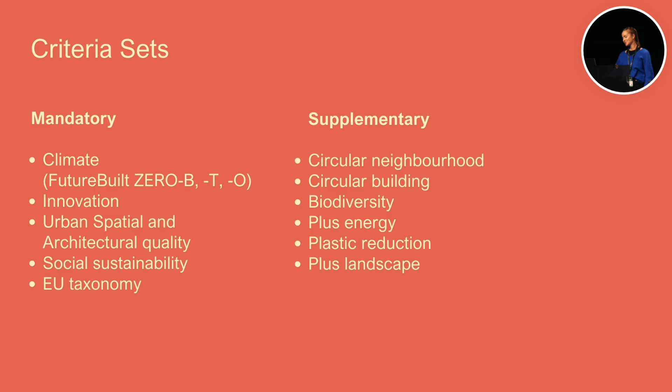And it addresses three main areas. It's B for buildings, T for transportation and green mobility, and O for område in Norwegian, or districts and neighborhoods in English. So the main goal in FutureBuilt ZERO looks quite easy to understand: cut emissions by 50%. And I'll come back to this 50% goal, because even though it looks quite clear, this is quite complex. It's a sliding scale, it differs by building typology, and a lot of research is behind this.

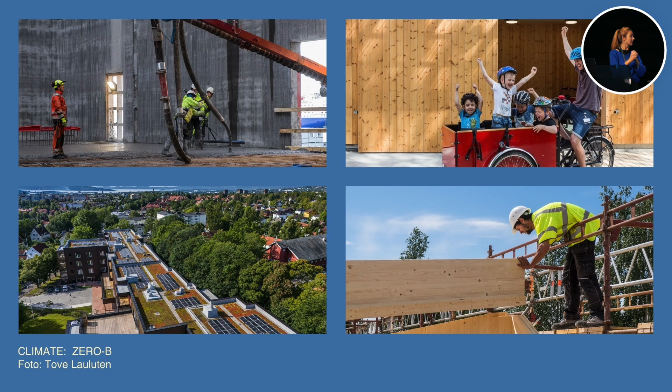But all of the projects need to cut emissions from our four key areas: the construction phase, operational energy use, building materials, and transportation during operation, during a calculation period of 50 years. So to succeed, good decisions must be made early. And our projects need really good data, as we have heard a lot about today, not just to calculate the final building, but they need an information tool so we actually can make good decisions, and also a user interface so the decision makers actually can choose the climate-friendly options. So the data is the key, and this is also where One Click comes in.

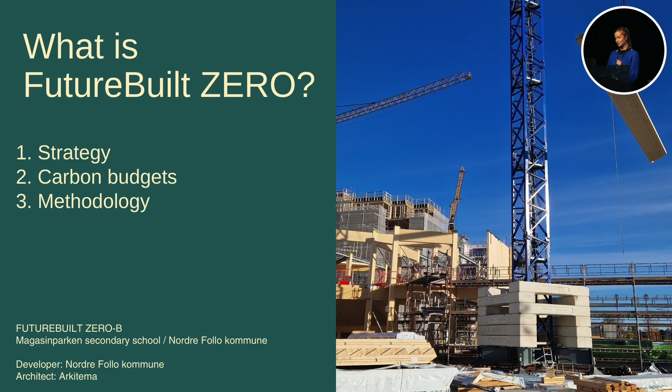So a bit about what FutureBuilt ZERO is, because it's many things. It's a strategy, it's a carbon budget, and it's a method. So first, as a strategy, FutureBuilt ZERO supports the building industry as a key actor in meeting the Paris Agreement. Our sector must take responsibility for its own emissions. And here you can see the reduction roadmap, or the path to net zero.

The Paris Agreement says, as probably all of you know, that we have to cut emissions by 50% in 2030 and 90 to 95% in 2050 from current practice. And you see the current practice here is at 100% in year 2020. This current practice is then projected with the targets in the Paris Agreement, shown in the orange line up there, also sometimes called by us the Paris curve. It's easier to just say the Paris curve.

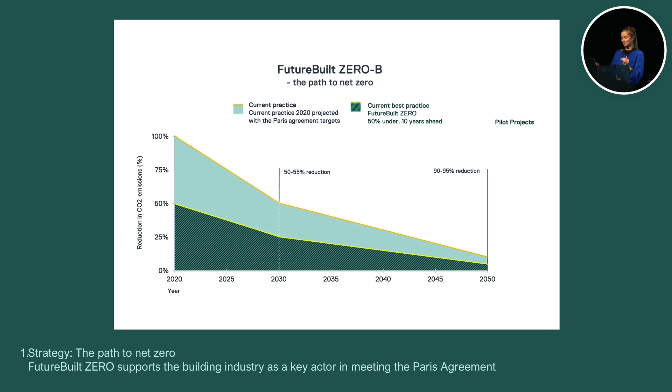So FutureBuilt pilots, they must go even further, 50% below the Paris curve, shown with the yellow line. So this is actually the FutureBuilt ZERO benchmark, the maximum value of CO2 per square meter, depending on the completion year and the building type. And we have 13 different benchmarks for the 13 different building types or categories. So as a carbon budget, so that was the strategy, the budget.

Each dot here is representing a building project, and each pilot must deliver carbon footprint calculations in 3 phases: as designed, as built, and after 2 years of operation. And as you see, this is a mix of all of these 3 calculation types. But as you see, everyone has had the same goal. They want to go below the yellow line. Some succeed, some are still working on reduction. But we can definitely say that we are learning valuable things.

It is harder. Can I take the pointer?

Okay. So it is obviously harder for a listed building with cultural heritage connected to waste-based district heating, as you can see, the first red dot there. It's much harder to reach the benchmark than if you look at the light blue-green dot down here, which is a mass timber construction with its own ground source heating system.

But the shared trend is clear. The more actively a project uses carbon calculations as a management tool, from early phase throughout the operation, the better the results.

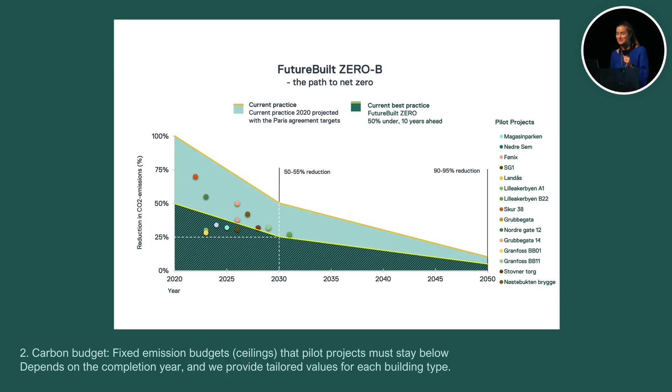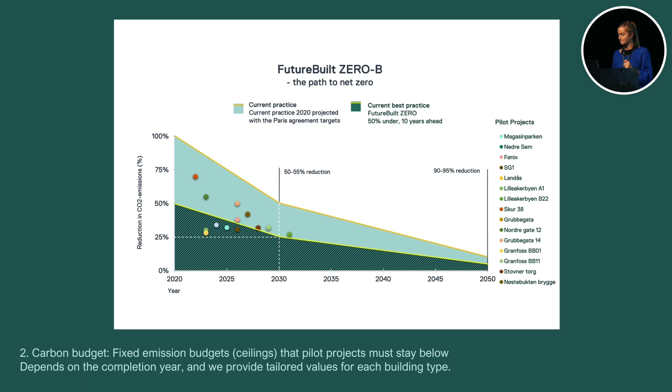And this is a bit more about the 50% goal. As you can see, the Paris curve and the FutureBuilt curve are not linear. So the 50% target is an ever-tightening target. The 50% reduction only refers to current practice in 2020, and then it's a sliding scale. So this means in 2030, we are aiming for 75% reduction compared to levels in 2020, but always 50% below the Paris curve.

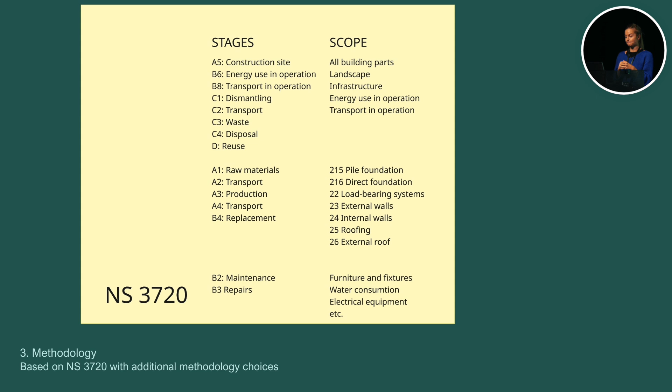So that was the strategy, the carbon budget, and now the method. Since we are trying to help the projects build the lowest carbon building projects in Norway, it's crucial that our method is consistent and comparable. So FutureBuilt ZERO is based on the Norwegian standard NS3720, and in this figure, you can see all the stages and the scopes included in an NS3720 calculation.

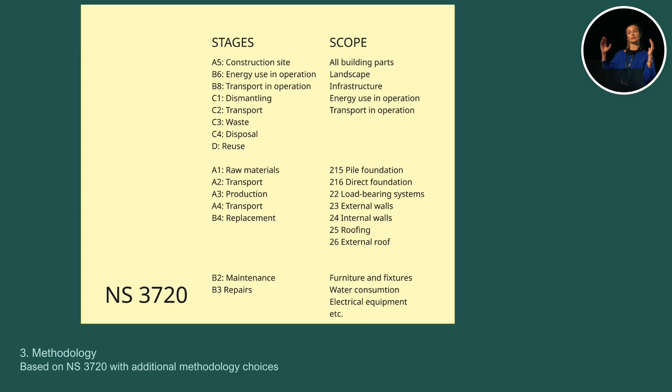So FutureBuilt ZERO is aiming for a wide span. It's based on the Norwegian standard, but in the standard, you can make different choices. For example, you can choose to use the Norwegian electricity mix or European, and all of these choices that are not defined make very unpredictable results for us. So therefore, we have predetermined some of the openness in the standard. And on the right, you see some additional methodological choices in ZERO.

So ZERO includes a dynamic LCA, meaning it accounts for when emissions occur. So we have time weighting, technology development, carbonation of cement, biogenic carbon uptake, potential for future reusability, and also a 50-50 allocation of district heating when it's based on waste handling. So we need our own method to control all of these parameters so we can learn from the pilots, compare them and identify the right path towards net zero.

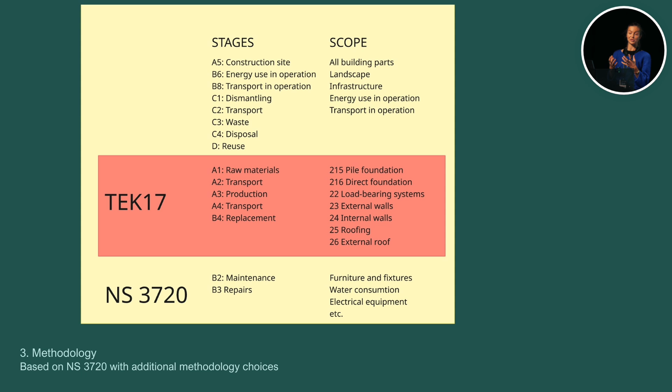These methodological choices are not necessarily more expensive or more complicated; time weighting is simply an adjustment. So the main challenge here is the expanded scope. But of course, we really want to know the whole history of the building. So we want to include ground and foundations and HVAC systems in our calculations, because that gives a real impression of the building's footprint.

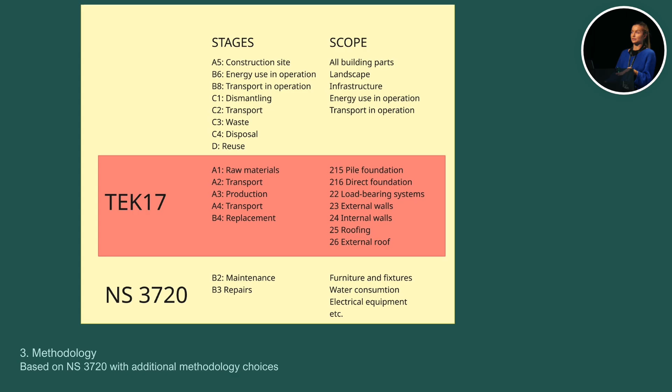For more information, you can go to our website and read the criteria in the text. Or you can also soon go in one click and a lot will be fixed for you.

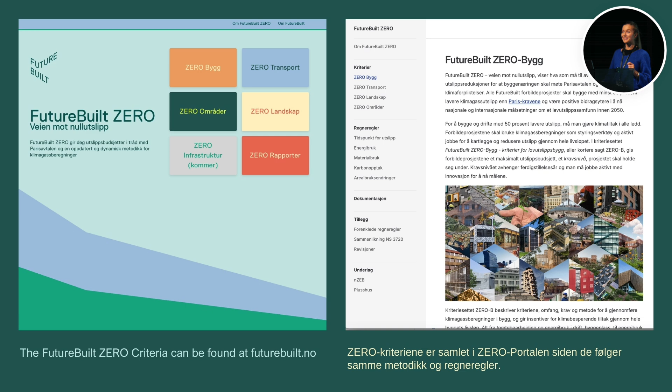So why does this matter? Well, ambitious innovation projects must present honest numbers on real emissions. When our projects use innovation to reach the goals in the Paris Agreement, we need to know if the innovation is taking us where we want. And this is supported by data. We need to have control of the data to be able to compare pilot projects and learn from each other.

If the innovation in the projects, for example, gives really good results in material emissions, but energy use is way too high, this is highly valuable information for us. And we work really hard also to try to avoid hidden emissions. We rapidly increase the scope as soon as the industry is able to calculate new building parts, and we can make reference values, divide them by 2, and make the 50% targeting on that part of the building too.

Yes, ambitious pilots need strong tools. So FutureBuilt is an innovation program, not a certification system, nor a tool producer. So we are totally dependent on good data and therefore software developers, so our projects can cut emissions efficiently within a natural workflow. So we are very eager to say that One Click LCA and FutureBuilt are collaborating, developing a ZERO-B module in One Click.

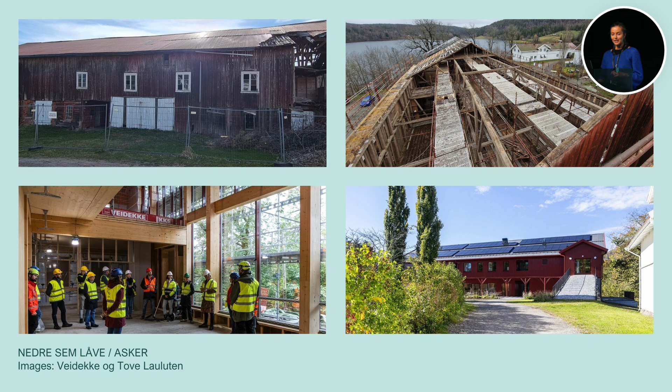And here you can see the next pilot is Nedre Sem barn in Asker municipality. And here an old barn was transformed into a new built care home using a significant amount of reused materials. It's a massive timber construction with a significant amount of reused materials, as I said. And they are also supported by a ground source heating system. And as a result, they achieved a very comfortable margin on ZERO-B.

And that made a very interesting story because this project also worked with our plastic reduction criteria. So because they had this margin and had some flexibility in their project, when the emissions were already quite low, they could actually afford to install cast iron pipes in parts of their building instead of using plastic.

And cast iron has a higher carbon footprint than plastic, so in-project evaluations enabled by good data and real-time feedback allowed them to meet both the FutureBuilt ZERO criteria and reduce the plastic in the building by more than 50%. A strong example of reuse, plastic reduction, and good LCA management.